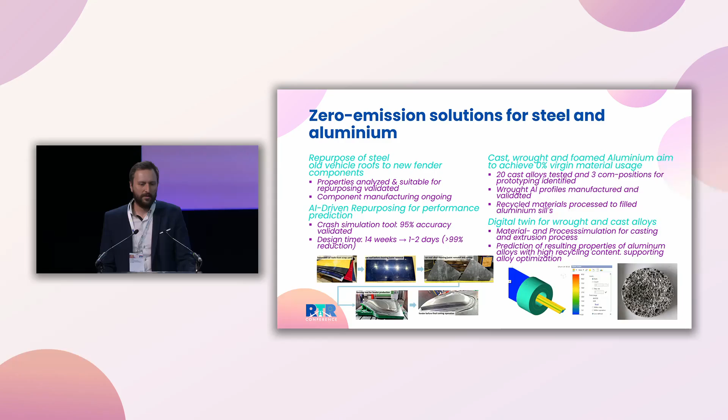On our aluminum use cases, we have casting, wrought aluminum and foamed aluminum. We have tested a lot of different alloys and castings, and now find good alloys to go into our production of the prototypes. This is also supported with a digital twin for material and process simulation to get better results and be faster in development.

On our plastic and composites use case, we had the first organosheets made of recycled PET and GMT with up to 97% PCR content. That will go into a battery cover demonstrator.

On just plastics, we have ABS, PP, and PA6 with up to 70% PCR content, and all these materials are now qualified. We did the simulations, the testing, got the material properties, and now go into production of the demonstrators, which will end up in our car.

The last use case is the only one where we are not using recycled material, but we are trying to get innovations in production and processes to reduce CO2 emissions as well as water. So we do some printing processes and laser cutting to reduce impact there.

The last use case is our rubber use case by Continental, where we have a tire with 45% closed loop recycled material, and the colleagues are actually on performance testing, safety and rolling resistance.

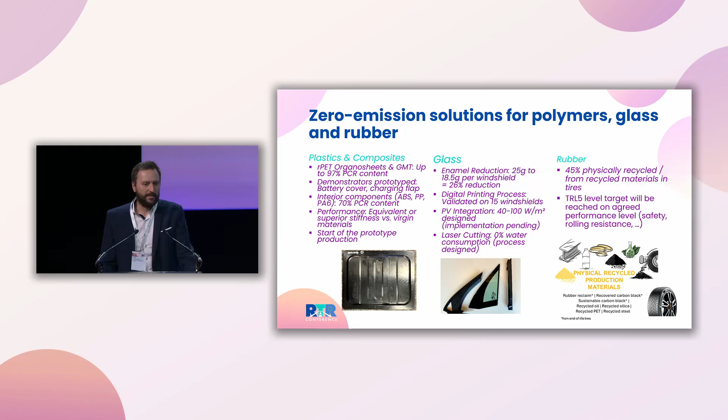Besides the topics of material and processes, we also work on the architecture of a car, mainly done by ERTRAC and our OEMs. We want standardized modules with a reduced material mix. If you see on the car today, we have a lot of different materials and alloys, and we have to reduce that to get less various materials and have better options at end of life.

So we have to develop joining techniques which are easy to disassemble, so that we can disassemble the big modules and then bring them to recycling or end-of-life technologies. We did the body in white, as you can see here, and now the work on interior, exterior and wiring goes on.

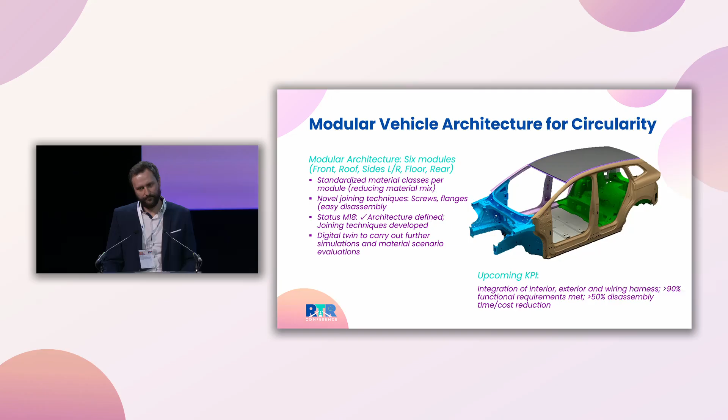Come to our stakeholder engagement. We have done some workshops and conferences, trying to use formats like gamification and discussions to get input for our project and insights from the industry. We want to build on that and go further, to get more input on whether we are on the right way with our solutions.

Our training and educational platform is launched. We have the first courses designed for our circular economy methodology for aluminum recycling, and the other use cases and innovations should also come to the platform.

When I come to the expected impacts, I made some assumptions. On the left side, we go with reduction in the glass use case of enamel. We now have 0% virgin aluminum, high content of PCR plastics, steel repurposing, and 40% of recycled tires.

Just to show the impact, we have here the EU EV market, and our 5 OEMs of the consortium cover at least 60% of it. If we say we can cover 84% of the material mix, that's the potential. I know that's a rough estimation, but just to show the potential. If we go through the different innovations and technologies, we can have a lot of reduction and saving of virgin material and CO2 emissions.

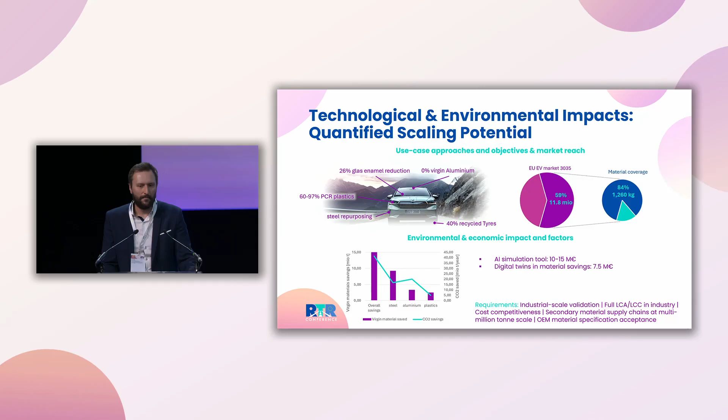In the topic of economic and social impacts, the transforming potential, we can save money by using secondary aluminum. We have a DigiPrime platform where we want to scale up for plastic recyclate and integrate secondary aluminum, which is a big market of secondary materials, traded in very high amounts. Using a digital passport for at least 12 million vehicles per year also has high potential.

Then we have our training program, and we want to achieve at least 750 trainees in 5 years. If we use the trainer effect, where everyone trains 5 others, we can scale that up and bring more knowledge to the industry.

In total, we have 420 stakeholders engaged now. We want to go further up to maybe 1,000. In the end, if we can adopt the innovations and ideas, we have a big market in the EU of 140 billion in the manufacturing sector, with at least 2.5 million employees and 13 million vehicles produced per year in the EU. It's a very big market, and if we can achieve some innovations, some reductions in the use of virgin material, that can have a very big impact.

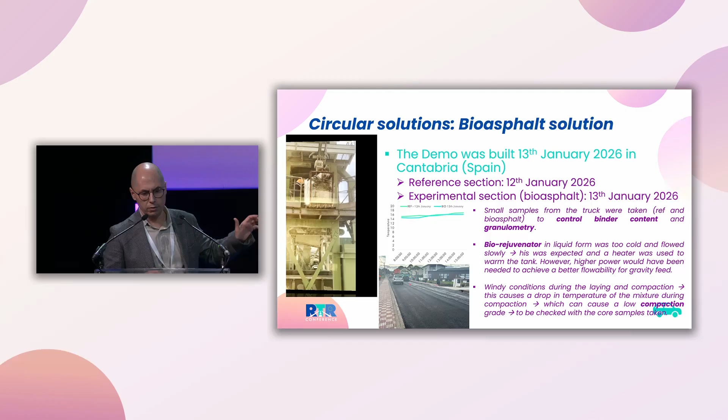First of all, the bioasphalt solution, as you see here in this video. I think it's a good idea after lunchtime to take a look at it, just to give you an idea about the solution we are promoting here.

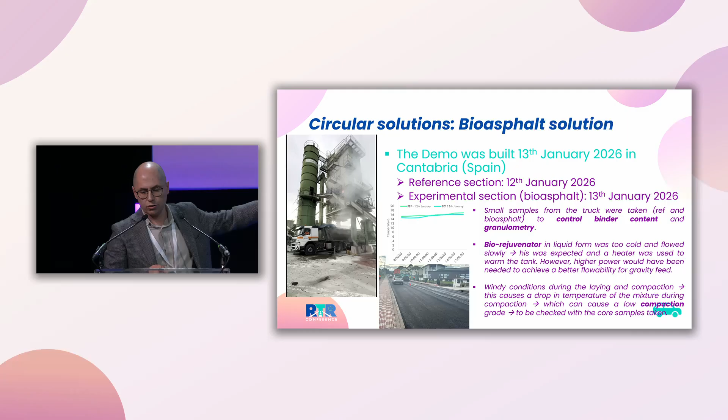This is a validation that has been recently developed, as you see here, on 13 January. And we have different lessons learned. As you can see in the third point, due to windy conditions during the laying and compaction, we found some problems that at the end reflect some cracks that we are repairing right now. My colleagues are repairing these cracks that happened during this process.

Continuing with the circular solutions, we can talk now about the solutions developed by our colleagues from Slovenia: the low noise and vibration railway circular track. This solution is really needed because in Slovenia they have problems due to the low quality of the ballast. So they thought of including some recycled ballast aggregate and also some scrap rubber from recycled waste tires to reduce the vibration and improve the dynamical behavior, and also just to improve the quality of the ballast.

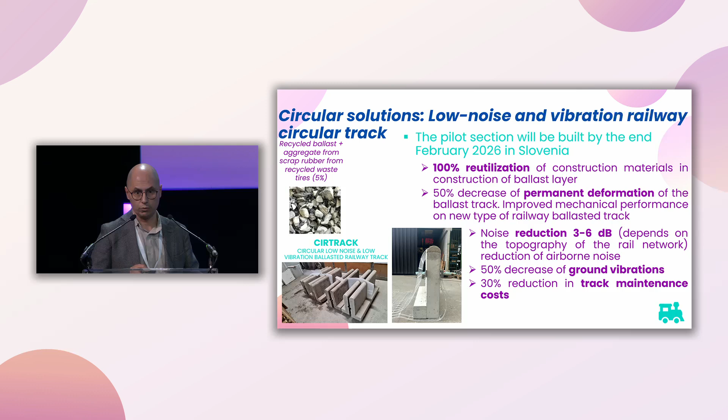Also, they developed this CIRTRACK, as you see here at the bottom of the slide. That is a solution that has been patented, and the idea is to reduce the noise and minimize the vibration of the ballast railway track, in combination with the previous mixed solution for the ballast. So we guarantee 100% reutilization of the construction materials. We reduce significantly the permanent deformation of the ballast track, and this is something that is going to be tested in the next days, bearing in mind the weather conditions that we have now in winter, and also in Slovenia.

The second cluster of solutions are the ones that we call the industrialized solutions. There's another video. These industrialized solutions are mainly based on a new recycled concrete for building slabs that also embed a weigh-in-motion system, and also a new design for beams that reduces the total amount of concrete consumption by more than 30%.

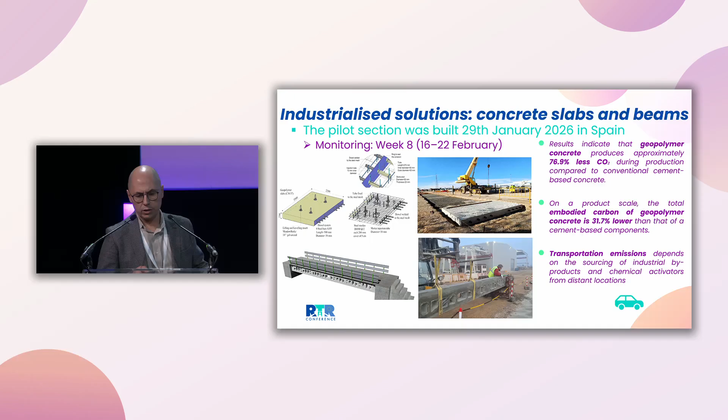So we talk here about digital twinning, in particular in this solution, because we make use of digital twin for two different phases in each solution. Regarding the concrete slabs, we embed this WIM system, and of course we have a digital twin to be used when the solution is put in place, to detect when damage appears, and to make an optimization of the maintenance: disassemble, put another one, and so on.

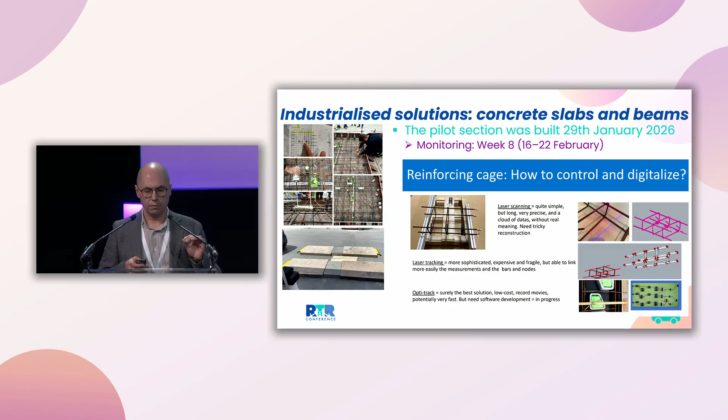But here we also include a new approach for the digital twin, just for the building of the beams, because as you see here, these beams have a special design with many holes that needs very specific control of the geometry, just to design and tailor the specific formworks that we need to use to build the beam at the end.

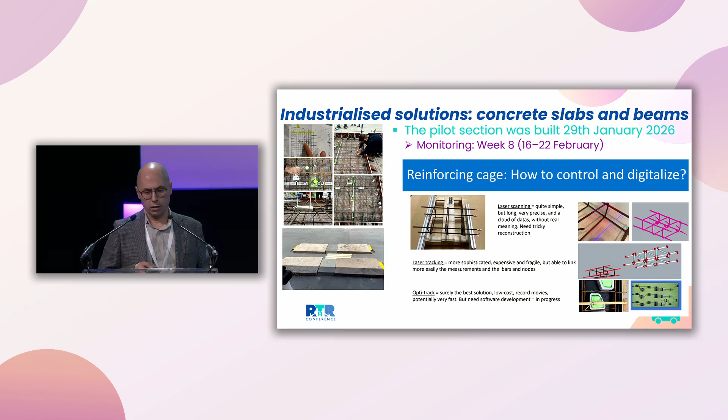So we include the digital twin from the very beginning. Also, we install different sensors embedded in the beams just to guarantee quality assurance and quality control conditions. And this solution has already been installed in Spain.

The third cluster of solutions is the one we call smart operation and maintenance solutions for transport infrastructure. The first one is focused on energy optimization. This solution is based on the development of a digital twin for a real tunnel in the Basque Country, in Bilbao, Spain. The idea is to optimize the energy consumption due to the tunnel fans and the lighting systems.

Thanks to the collaboration with our colleagues from Citron, we developed a new digital system to trigger energy demands, reducing consumption when necessary. Also, regarding the lighting system, we include new scenarios to improve the current standards that we have right now in Spain and all around Europe, trying to optimize the energy demand and the energy use of this electricity.